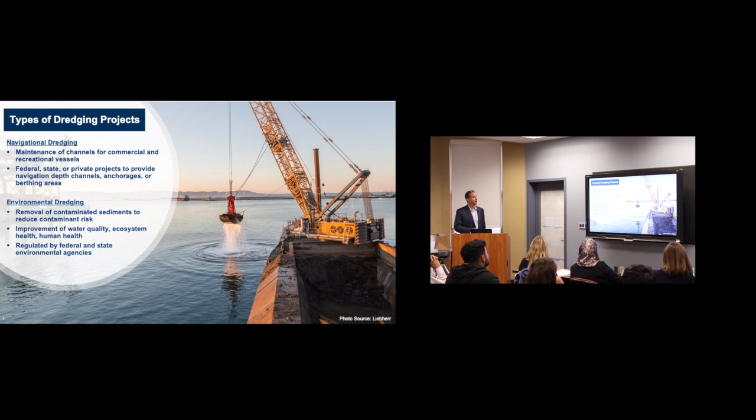Looking at navigational dredging for the port of New York and New Jersey, I think it's the third busiest or most active port in the United States, and the most active port on the eastern seaboard. So there's a lot of dredging, a lot of maintenance of the channels in this area. About 3 to 5 million cubic yards of dredged material are removed annually. Given the fact this is an industrial waterway, you can see in the photo there's a lot of background contamination from urban sources, just runoff from stormwater and other historical industrial operations.

So this is just a plot of PAHs within the harbor dredged material. You don't have to take too much from it, other than the fact that there are PAHs in the sediment, and sometimes those have to be managed accordingly. Whatever you want to do with that material afterwards needs to fit some criteria for the end use, and sometimes the PAHs or other contaminants might restrict that. So we might need a way to manage that.

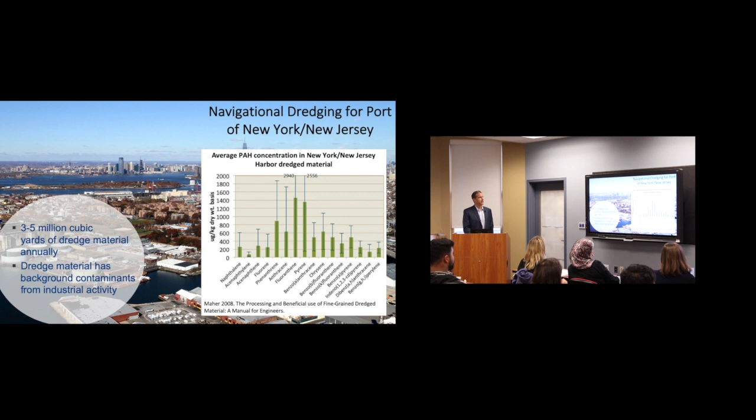So that's navigational dredging in this region. I'm not sure if we can see Stevens in that photo, but probably could if we look close enough.

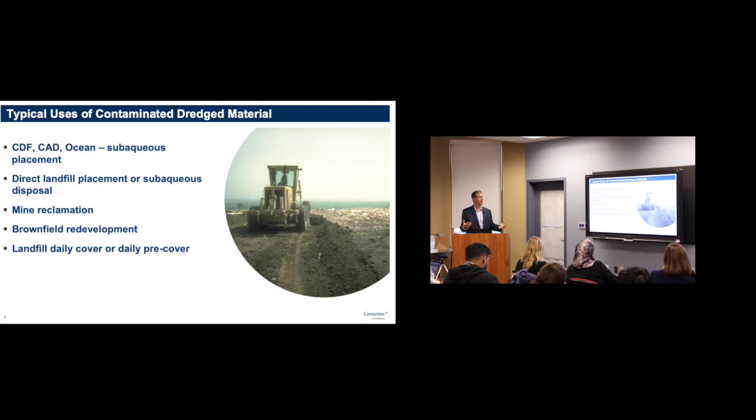This is a source that we showed—millions of cubic yards are dredged annually. It's kind of a supply and demand type thing. So this is what's typically been done, but brownfield redevelopment is tricky because you have to line up when the material is available with when the site needs the material. You need it to work out just right.

Landfill placement has typically been the most common approach, but why are we looking at alternatives? Why do we think there's a better way? Number one, the remediation cost to the responsible parties. Looking at environmental dredging, I mentioned billions of dollars being spent, and the majority of that cost is managing the sediment—not getting equipment out there to dredge or doing other work at the site, just getting rid of the material. Probably a third to a half of the cost of these projects is just disposal. So we want to cut that cost to the responsible parties and the public to the extent they're paying for it. Finding a more sustainable approach to manage this material certainly pays off in dollars.

I mentioned earlier the CDFs and CAD facilities. Their capacity is filling up, so we don't have the same locations to put this material anymore. I think in Lake Erie there are CDF facilities filling up, and they're going through a beneficial use management plan right now, trying to figure out how best to use the sediment they need to dredge from the Great Lakes.

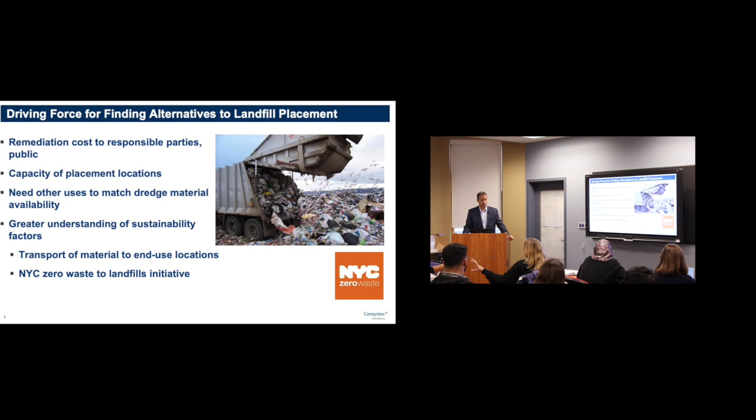The last bullet is greater understanding of sustainability factors. Sustainability is becoming a larger trend, both in terms of transport of material to end-use locations, but also initiatives such as New York's Zero Waste to Landfills initiative, which ambitiously seeks to reduce any deposition of material to landfills by 2030. This applies not only to dredged material but also biosolids from water treatment facilities. If we can find beneficial use for sediments and biosolids, that fits their initiative and meets their goals. So there are several driving forces away from landfills.

I've used the term beneficial use a few times. This has been a major focus area in sediment management for a good 20 years or so, but it's really starting to ramp up now given the factors we just mentioned. A few panels have come together—this is from CEDA, the Central Dredging Association, and they've defined beneficial use, as you can see there.

They've looked at 5 R's, as they've called them, for how best to use dredged material: raw material, incorporating dredged sediment into things like bricks; remediation of cleanup sites, processing dredged material and using it as clean fill; and reclamation, expanding existing land. But we've highlighted the last two—restoration and resiliency, shown in red—which have really come on in the last few years as opportunities for this material, given climate change and the hurricanes that have come through.

There are more projects looking at restoration and resiliency. So in terms of matching up supply and demand—the demand for fill is growing, and the supply is still here—so maybe we can connect the two.

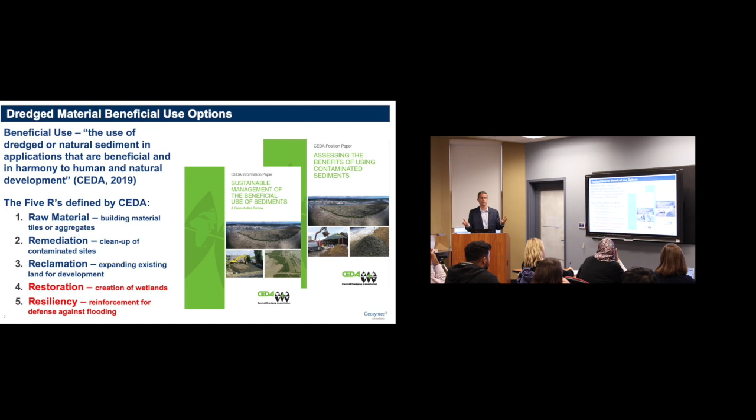I don't know what they call it, but you get certified as being responsibly developing the waterfront. This was launched in 2015 by a New York City-based organization, Waterfront Alliance. They've got a sister organization in Philadelphia, and I think they're looking to make it go nationwide. So there's definitely more attention being placed on this.

So I'm just going to walk through a few slides on dredged material management, what happens to this material after you dig it up. And then Russ is going to talk more about, from the sustainability side, can we do some quantitative evaluations of what the benefit is from a sustainability perspective. I think that's why you're all here, so we'll try to get to that a little quicker.

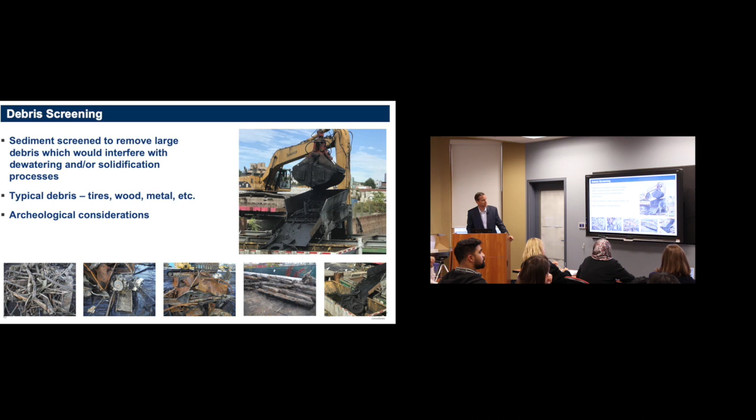So the next step, once we get the debris out, is to try to stabilize or solidify the contaminants. This typically refers to the use of Portland cement, added to the sediment and mixed up, to do two things: number one, it's going to bind a lot of the components, such as metals, right into that matrix. Or you can entrap the contaminants within that, and that's more with the organics. The end goal here is to make this a safe material, something that can be transported and placed at the end use disposal.

So when you're looking at leaching from the sediments, you're binding everything up in terms of the metals and the organics. It's also a way to dewater the sediment as well, so you can transport it properly.

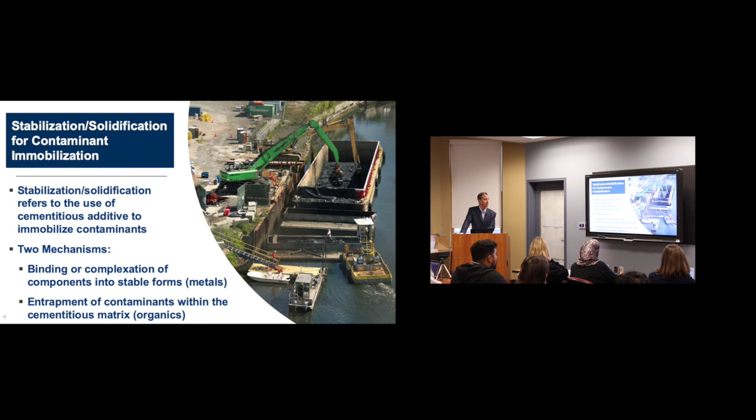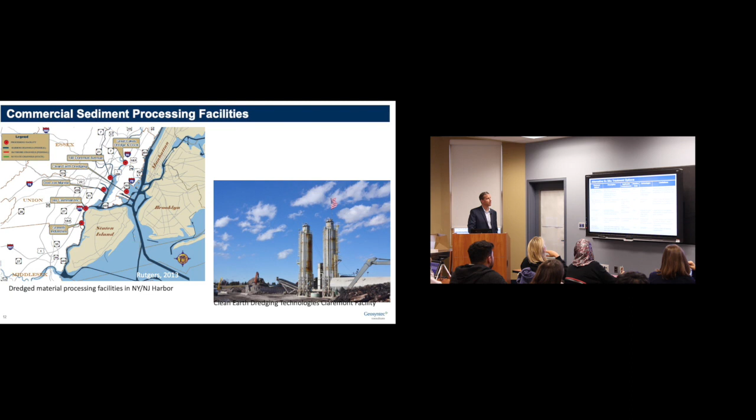Here's a few options. This is a table that we put together in terms of how best to manage the material, and we're not going to go through all of these in detail. We've got pictures coming up of each of these, but in general, there's a few ways to process the sediments to render them safe for the next use, whether that be going to a landfill or some sort of beneficial use.

Even when you take it to a landfill, there's acceptance criteria that needs to be met - chemical acceptance criteria, physical acceptance criteria. You can't just send them anything. They need to test it and make sure it meets whatever their permits say they can take.

In order to do that, sometimes you need to process or treat it. Here are a few options. There's low temperature thermal desorption, which is applying heat to volatilize some contaminants off of the sediments. This is applicable to whatever's volatile, and petroleum hydrocarbons are the best. It's a relatively high cost because there's a fair amount of energy going into it, but you do get a clean end product which comes out of it because everything's sort of baked off.

One of the issues here is the dewatering, because if you have a lot of water in there, that's going to take the energy of the heat instead of the volatilization from the contaminants. The water is just going to soak it up and you're going to evaporate the water.

So you could go to high temperature thermal desorption, which works a little better for some of the less volatile contaminants like PCBs and pesticides, maybe even some metals. This works even a bit better, but of course it's probably more expensive.

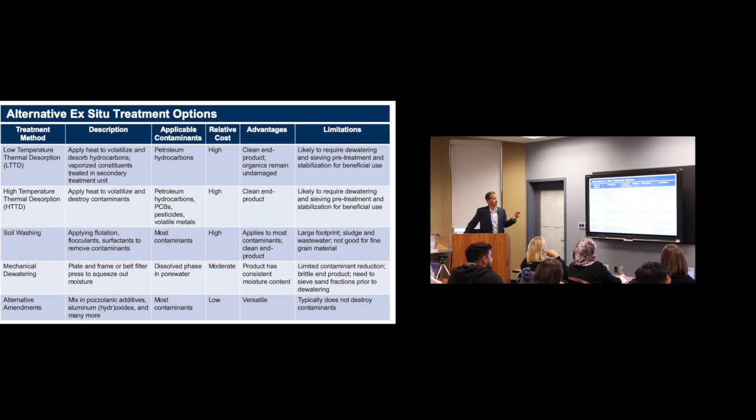Then there are some alternative amendments, which we were just discussing with Dibs a bit ago, mixing in things like alum, aluminum hydroxides, and others for more specialty applications. The relative cost is low and it's versatile, but depending on what you want and need, those could be available. So the point here is there's a lot of options, a lot of things we could do to render the material suitable for the next step.

We've just got a few pictures of what this looks like - this is the desorption facility. It's a pretty large footprint, a lot of process engineering involved. You can see there's a dryer and roaster in the middle of all this, shown in orange. You're adding the material to that, drying it out, and at the end you've got clean soil, which looks really nice.

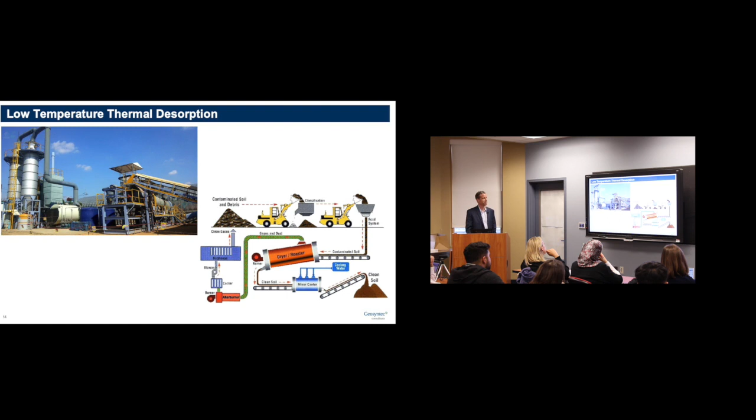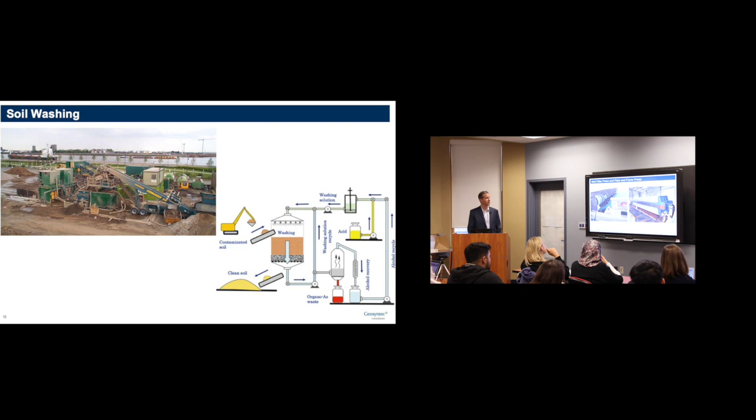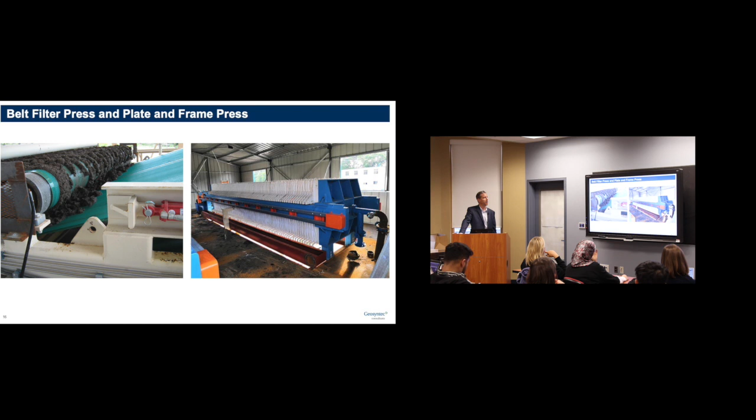This will be my last slide - I'll turn it over to Russ. But this is just a chart of some of the projects that were accepting dredged material. This is back in the 2013 time frame, so it's a little dated, but the point is you can look at it and see there's a lot of projects matching the use of dredged material with the end use. You can see there's a number of landfills, mines, and some golf courses that get used.

If you're out at a golf course and you see all these hills, a lot of that might be from dredged material because it's cheap and it's available.

But what's been coming on more in the last few years is the opportunities with resiliency projects. A lot of resiliency projects are being designed right now, and they're probably going to be constructed. I know there's been several of them already. There's the Battery Park City Resiliency Project, the East Side Coastal Resiliency Project in Manhattan, Lower Manhattan Coastal, and a few others. All of these projects are looking at raising the level of the grade, raising the elevation to protect against floods and storm surges.

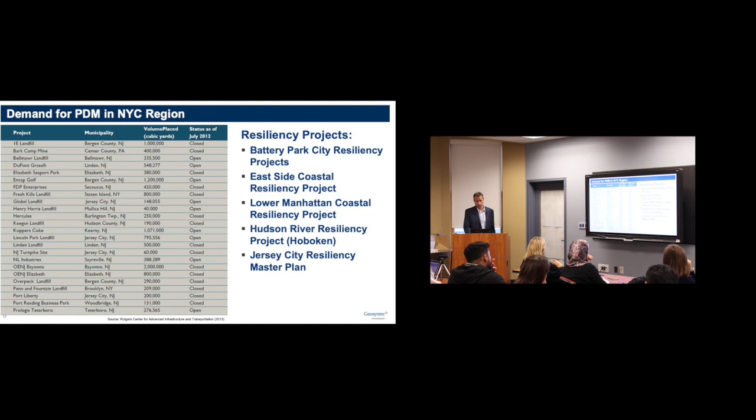In order to raise that grade, we need material. Dredged material is a good source of that. Is there a way to render it safe, and is it a sustainable approach? That's where we have come in and started to take a look at this.

And Russ, I'm going to turn it over to you. You want to go? You want me to do this one? Okay, I'll do this one. This is I'll do. I can't do all of them.

But that's a lot of material when you start looking at it. It's a large volume of material. There's dredging projects happening right down the river, so why don't we just dredge it and bring it over here? And that's kind of a great supply and demand story.

So this is just one example. There's all sorts of other projects in the works, in Jersey City, in Hoboken, and in New York City. If we can try to match some of these up, it's a great opportunity, and we don't put as much material into landfills.

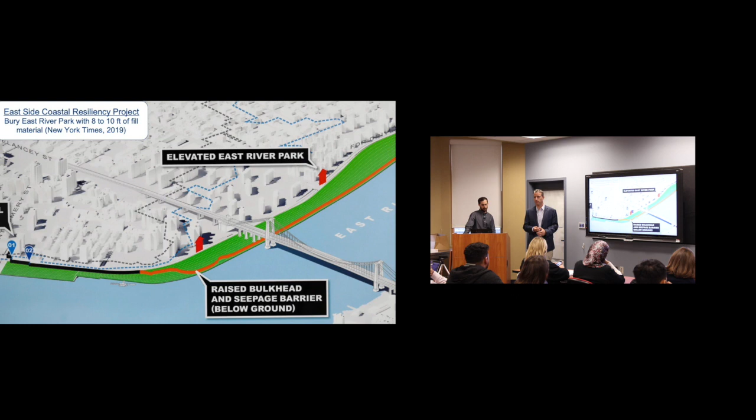So Dave was talking about one of the alternative methods we have for using this dredged material instead of stressing our landfills, doing the more traditional beneficial use applications, like the resiliency projects. The other idea we're floating around right now is, what about taking that dredged material from these environmental projects and putting it back into the same waterway? So it's a little bit of an outside the box thinking idea.

And the questions that we have to ask ourselves as engineers are: one, are there measurable benefits here? Is it even worth doing it? And two, is it safe?

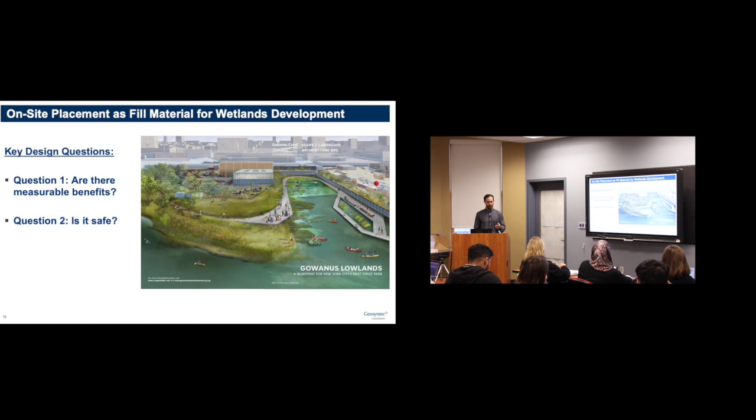Are we going to potentially be leaching out the material back into the waterway and just effectively not doing what we're hired to do here?

So just to give you guys some background, this is what a traditional remedy approach would be. You have your waterway, you have your soft sediment on top, your recently deposited material, and underneath that your native sediment. Typically they're both contaminated, and what you'll do is remove that soft sediment layer, leave the native sediment there, make a nice level area, and put down your cap.

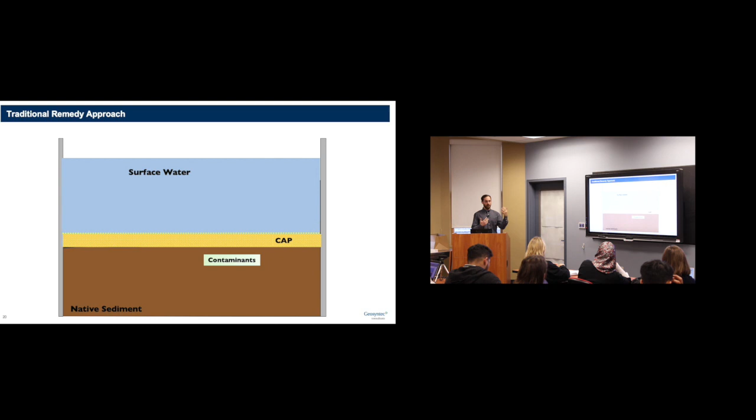Now this cap is a reactive cap, a reactive treatment layer, or there will be reactive treatment layers in it. So any contaminants in that native sediment that we didn't dredge out, that cap is going to sequester and prevent anything from getting out into the waterway.

So our idea is, what if after we dredge that material, we process that dredged material, perhaps even on site, not even going across the harbor, and then put that processed dredged material back into the canal or waterway in some areas where you can. Obviously in some areas you can't do this because of navigational reasons—you don't want to increase the elevation. But in areas where you can, put it back in, then put your cap on top of that, and then add clean fill, and you can have yourself a wetland.

So some of the benefits to this approach—as sustainability practitioners, you can think of the three-circle Venn diagram with social, economic, and environmental, and in the middle is sustainability. Here's some of the more qualitative things.

One is the community—at these sites, they typically want to see, okay, you cleaned up the waterway, but now let's get access to it. Let's put a park there. Let's make it something the community could use. So doing something like this, you're integrating the community vision into your design, and of course you're going to have greater social and ecological value.

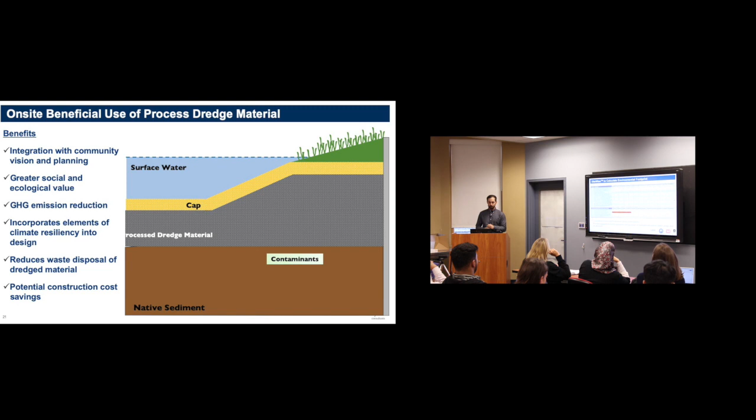So one of the more quantitative ways to do this—I don't know if you folks have played around with this—this is SiteWise. It was put together by Battelle, in collaboration with U.S. Navy, U.S. Army, and Army Corps of Engineers. What it does is calculate your environmental footprint for different remedial alternatives. You can use this to get a quantitative assessment on greenhouse gas emissions, energy usage, air pollutant emissions, water usage, and even accident risk.

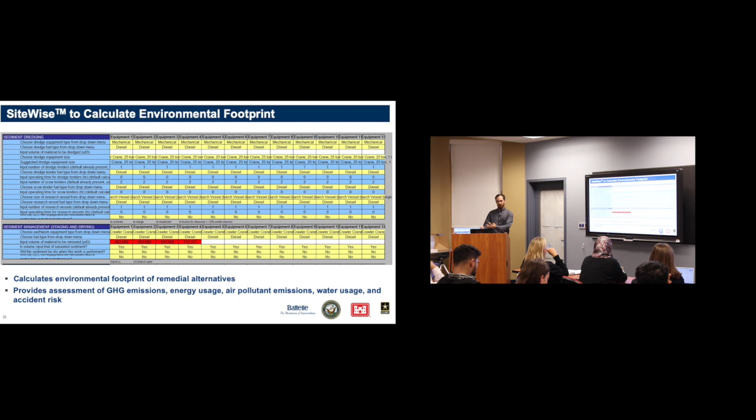So what we used this tool for in the analysis we did for this one particular site is just to get some quick ballpark numbers. Let's put in our scenario, or our different remedial alternatives, and get a sense of what the numbers look like. Then if this looks good, maybe we dive in deeper and do a real in-depth greenhouse gas emissions analysis, looking at scope 1, scope 2, scope 3 emissions.

So we compared two different alternatives. The first one, alternative 0, is placement of the stabilized dredged material at your landfill as daily cover. In that instance, you've got your dredge bucket, you drop it into a barge, transport that barge to a processing facility, add your Portland cement or whatever additive, stockpile it, let it cure, then load trucks and truck it out to whatever landfill you're using for daily cover. That's the more traditional beneficial use option.

The other option is what we're proposing: what if you just dredged it, put it in a barge, added Portland cement or whatever your additive may be in that barge, and took that material and placed it back into the waterway in some areas.

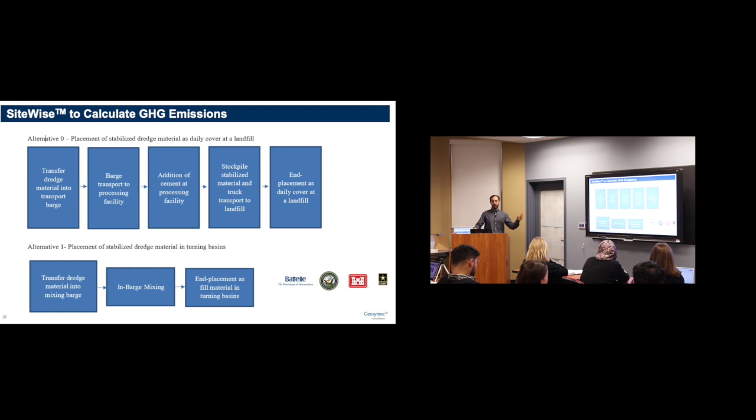So we ran the numbers and they look pretty good. This back of the envelope calculation is pretty promising, and we used 210,000 cubic yards of dredged material for this particular site. That was the amount of material we were looking at. And we were getting a 31% reduction in total energy used, 7% reduction in greenhouse gas emissions. That's not great. It's okay though.

This makes sense. And the other question that I brought up is, is it safe? What we want to do is look at the leachability. For leachability, what we want to look at is the long-term leaching potential, and we want to do a test where you mimic the waterway conditions.

So David mentioned that when you bring this material over to a landfill, you have to do waste characterization testing. As part of that, you'll do what's called TCLP testing, toxicity characteristic leaching procedure. That's a pretty traditional test, and really it's basically done so you can prove that your material isn't a characteristic hazardous waste, as RCRA says.

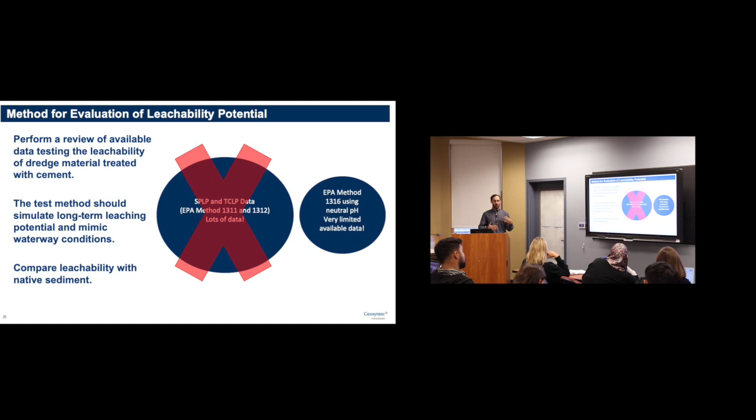What we also want to do is run that test - take a sample, do benchmark testing, put it in a mold, and run the test at 2 hours, then 2 days, then 6 days, and maybe even a year after, just to see what that long-term leaching potential is. So that's kind of the approach we're looking to take, and at this one particular site, we're showing you some data here.

I'll go back. But again, this is very limited data, and really all it's saying is it's worth looking into. Maybe we should look more into it - we should do some more treatability studies and really see what's going on here.

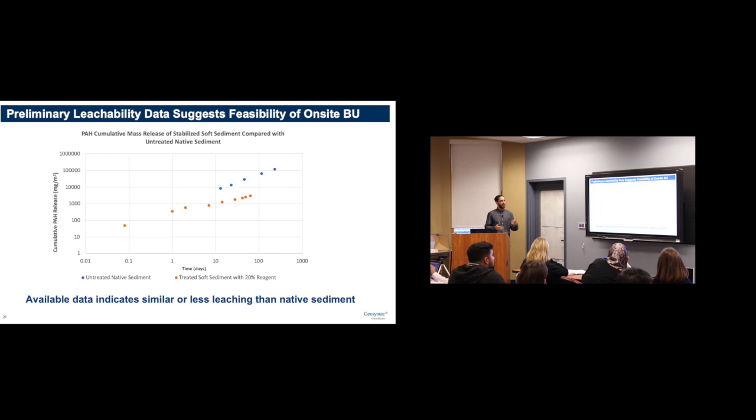Moving away from the technical realm and into the regulatory realm, these are some new ideas. We're going beyond what's typically done for beneficial use of dredge material, both what Dave was talking about with using it for resiliency jobs, and this idea of using it for on-site wetlands restoration. The regs are not really designed for that.

The other thing is to develop legislation that really promotes beneficial use, which is already out there. In fact, New Jersey mandates beneficial use whenever dredging is undertaken. But this is the more traditional beneficial use—they're counting bringing it to a landfill as daily cover as beneficial use. So we'd like to see more legislation that really promotes these other ideas of beneficial use.

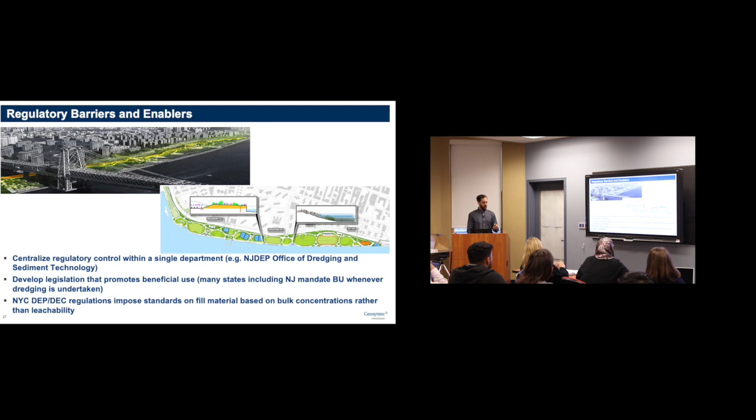Now, there are already a lot of green initiatives going on in the environmental field, both at the federal, state, and local department levels. EPA has a clean and green policy, and the idea of green and sustainable remediation practice is really a growing trend. Regulators are on it and looking at it, and they're coming out with guidelines now of what to consider from that perspective while looking at your remedial alternatives. So that's good and promising—we want to see more of that.

So just to summarize, Dave and I do a lot with these dredging projects, and there's a ton of discussion in this industry about beneficial use of contaminated dredge material. I think it's next week or the week after, we're going to a conference in Wilmington, Delaware, that's just going to be talking about beneficial use of dredge material, through WEDA, the Western Dredging Association, one of the biggest associations out there regarding dredging. So there's a lot of buzz around beneficial use and alternative methods for it.

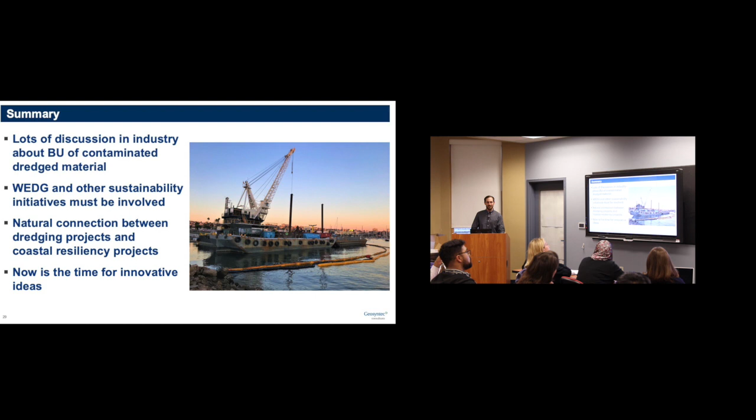So the last point is that now is the time to think innovatively, and hopefully something came out of this presentation that may have spurred some imagination or discussion, because we've got to get creative now. This is one of those ideas we wanted to present to you guys. I think with that, we've ended our discussion.